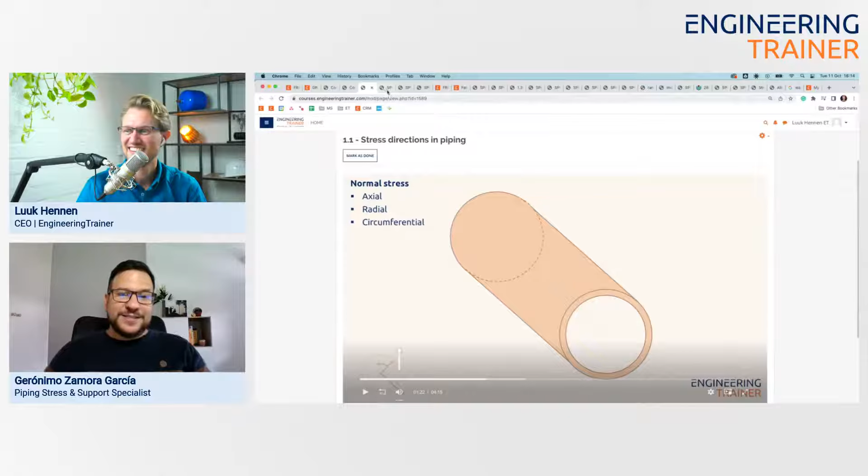So you say it as if it makes total sense that there's wooden barrels that have hoops. That has nothing to do with process piping, right? Is that back in the day, kind of shipping wine in barrels or something? I think when these codes were all developing, back in the 1940s, 50s, 60s, the technology was out there, and they basically said, okay, circumferential stress, let's call it hoop stress. It's the same hoop thing. Hence the name: it's basically the supporting hoops in the wooden barrels. Oh, that's a good fun fact.

So just to dive back into the course: hoop stress, we switch circumferential to hoop, which is displayed here. I won't go into detail about the derivation of the associated equations, we'll jump to those in a second. And basically, what happens every time is you neglect the radial stress because it's rather small. We'll show something about that in a second. And of course you include shear stress due to torsion because that one can be significant.

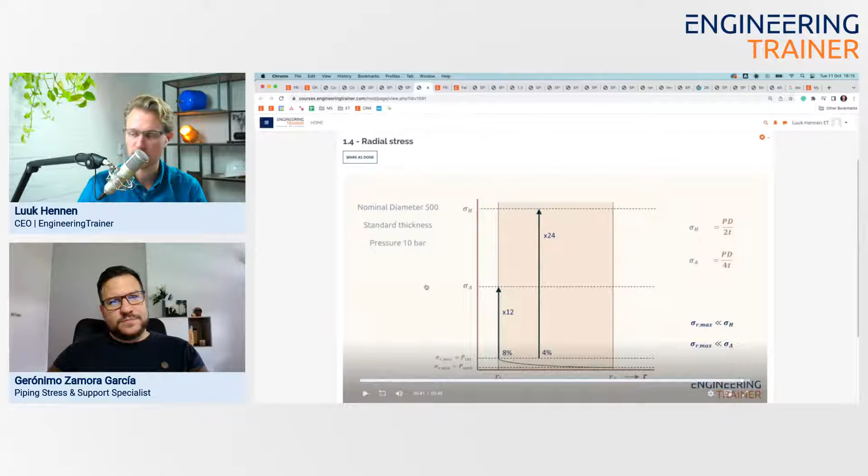As I said, radial stress is typically neglected for thin-walled piping. I did a quick analysis of those numbers for a nominal DN 500 pipe, standard thickness, with a pressure of 10 bars. You clearly see the bottom distribution - this line is the radial stress throughout the wall thickness of the pipe. Then if you jump to axial stress, and especially hoop stress, those numbers are just much higher. We actually have a different free module on thin versus thick walled piping available on the platform as well.

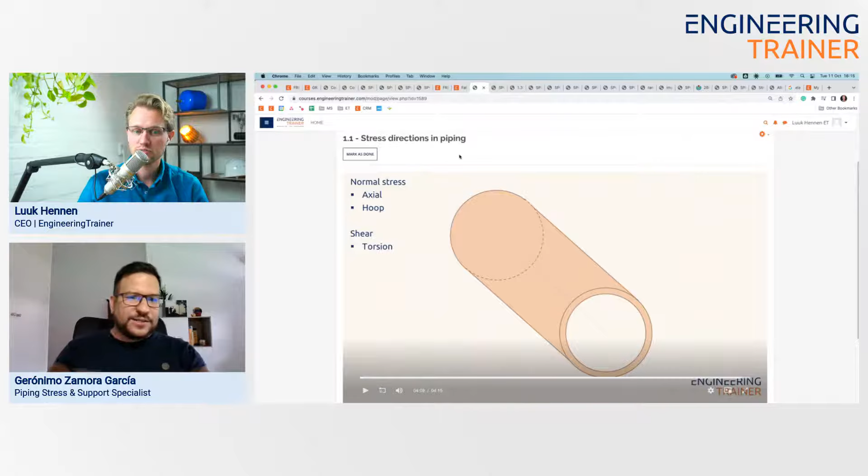All right, jumping back. So in these slides, it's really interesting too. We grab the normal stresses that are typically on a beam, and we take that out to a cylinder. So as normal stresses, you end up having axial stresses, hoop stresses or circumferential stresses, and then radial stresses, put in the coordinates of the cylinder basically.

And then those will be normal stresses, and then you would have shear stress, which the main one here is the one that tends to twist the piping, and that's torsional stress, which is basically the shear stress present in this field.

What's really interesting is, in thin wall piping, we're going to call it that because the thin wall piping is a very blurry definition depending on who you ask, or depending on which code you check. For example, B31.3, it's something -- well, not crazy, but it's thick enough. It's almost, it's not that high, but with the EN code it's almost the same. So to me, that's a thick pipe.

Like it's D over T higher than six, that ratio higher than six -- so that's a thick pipe, generally speaking. But it's that we're using, let's say, thin wall pipe equations to compute thicknesses there, to have some sort of degree of examples here.

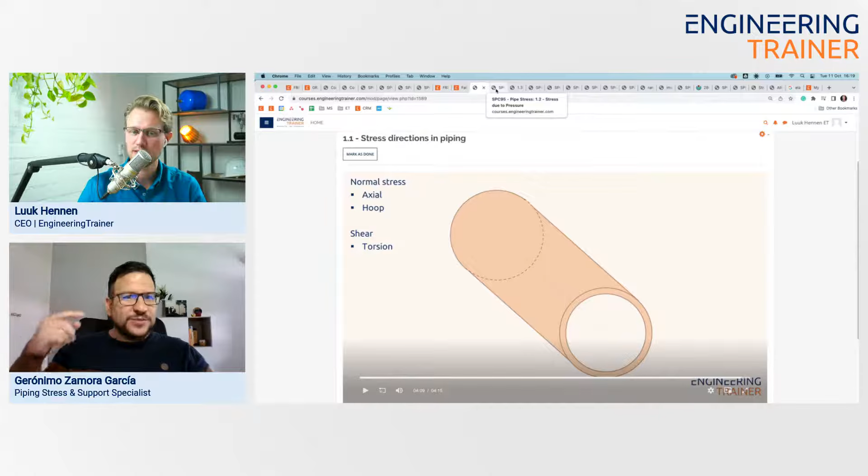So going from this, like when I started, you can, for example, derive these equations for pressure loading -- hoop stress is pressure times diameter divided by 2 times the thickness. For the axial stress, it would be divided by 4 times the thickness, and here the thin walled assumption is already made. The derivations, by the way, are in the course itself. But at some point you'll end up with these types of equations, which are pretty straightforward and are also very well represented in the codes.

If you look at the thickness calculations for piping in the ASME, but also in EN 13480, you'll definitely recognize the basics of this equation. But going from here to the actual code stresses, that was something that took me a while, and that's something we'll do a deep dive into.

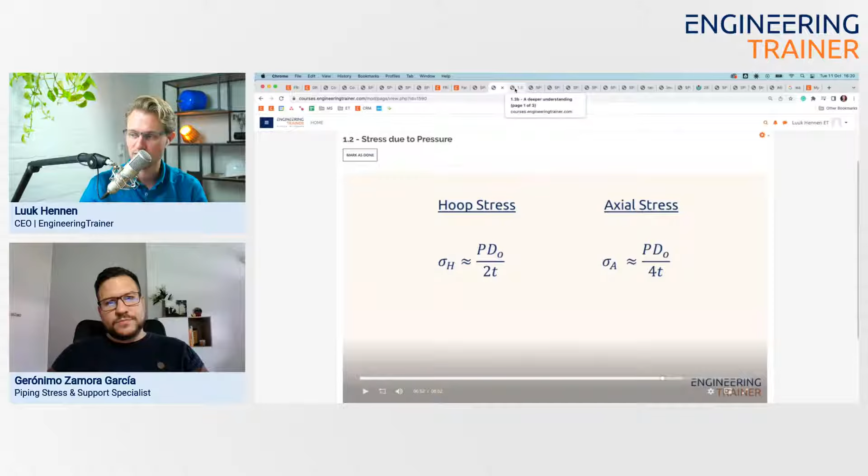Maybe a little fun fact for everyone watching, Geronimo, for you as well. I know you know the answer. Let's say if the pressure in a piece of piping is increased till the pipe bursts open, in what direction will the crack be? So yeah, what do you think?

So the reasoning behind it is like there's always a stress direction, and the crack is always perpendicular to the stress direction, right? So that's why in B31.3 and other codes you use the joint efficiency factor for the longitudinal direction, because in hoop stress the pipe will burst that way, which is important when your pipe is not seamless. You need to account for that efficiency longitudinal, right? As against what you might think, fair point, when you're computing, that's a fair question.

There's an interesting topic when working in the creep range, whether you use the weld joint strength reduction factor with the circumferential welding, because you're worrying about axial stress. So that's up to the designer in that code. But that will be the explanation for the answer, I think.

That's a good answer because you haven't given the exact answer itself. So the answer obviously is that the crack will be in the axial direction, right? I mean the highest stress component is in the hoop direction, circumferential direction, so the crack will actually go axial. But this question always gives good food for thought, in my opinion.

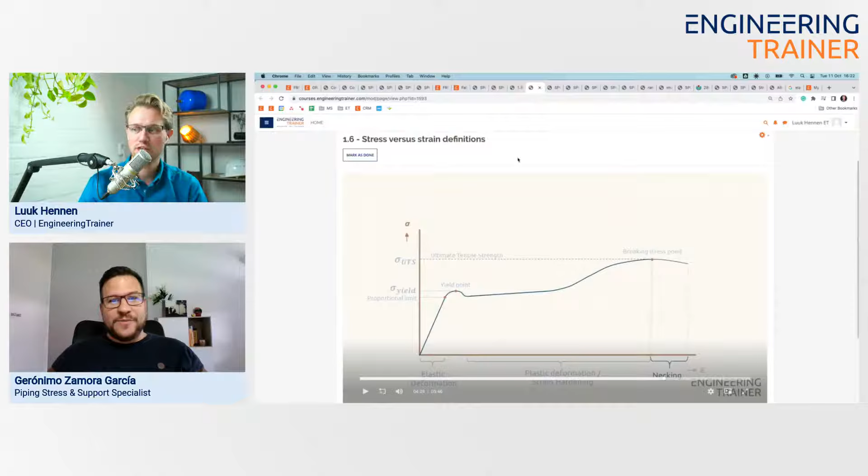So the question becomes, from these directions, we have axial, hoop in the normal, we have shear, torsion stresses, and on the other hand the typical stress strain curves, shown here with stress on the vertical and strain on the horizontal axis. This is typically a simplified view of a stress strain curve for, let's say, metal.

The elastic region is where Hooke's law is applicable. Then we have a yield point, and yielding or plastic deformation takes place until the ultimate tensile stress, after which necking occurs and the metal breaks. But this is a result from a uniaxial tension test, right? So you take a piece of metal and you just pull it apart and you measure the displacement and the force required to do that displacement, and you'll end up with this graph.

But that is in one direction, right? So the question becomes, how do you think about these different stress directions and forces working in the location of metal, and how do you compare it to the yield stress, the ultimate tensile stress?

And the answer, sorry, let me just point this out. It's super important for beginners that this stress strain curve represents, as you mentioned, ductile materials such as steel. Fair point, if you would have rubber or any fragile material, the curve would be completely different, right? I think that's actually in the course though, something like this, a rough, playful view, not to scare away beginners.

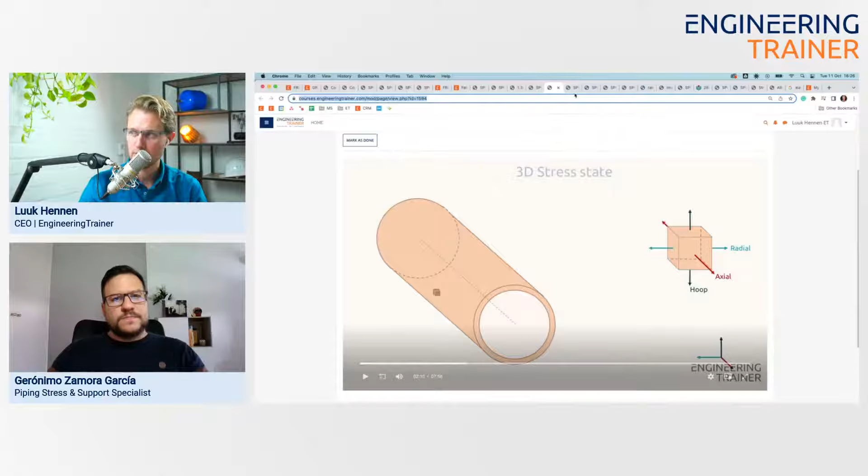You know how to go from the stresses at one location in a piece of piping to the code stresses. Typically, you can think of that location and evaluate it using a cube, which helps you analyze the situation. If you rotate the cube, you can analyze the stresses working on the surface of this cube for all different angles of rotation. That helps you build Mohr's circle, with shear stresses on the vertical and normal stresses on the horizontal.

If you do all those different angles for a 2D stress state, you would end up with all points lying on this Mohr's circle. From this circle, we define the principal stresses, which are these two points with zero shear stress, and we define the point of maximum shear stress. Then those three points for a 2D stress state are representable regardless of the orientation of the cube.

I think that's something to take away. So here, we start with the cube on an orientation that maximizes the normal stress, and if you balance that cube orientation with the geometry, you will maximize the normal stress. Then you start rotating the cube, and it gets to a point where you maximize the shear stress.

Mohr basically found that this described the equation for a circle, and we're able to establish on a chart where the horizontal axis is the normal stresses, and the vertical axis is the shear stresses. So the main goal is to compute, at some point, the maximum point in particular, tau max basically.

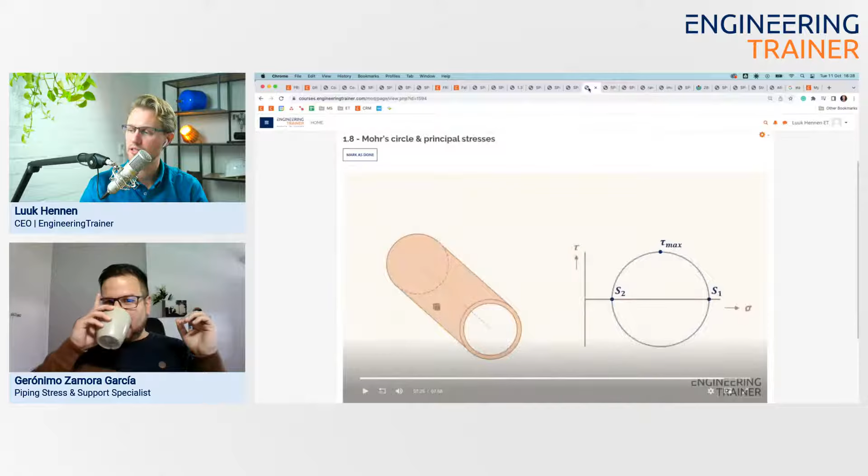It took me a while, and that's something I would like to emphasize: regardless of from which angle you evaluate the stresses at a certain point, if you run through the equations of Mohr etc., you will always find the same principal stresses and maximum shear stress for that location. So those really represent the 3D stress state at that location. That's something really important to have sink in.

Another important thing is how, as you described it well, engineers at some point did it amazingly, found a way to represent the 3D stress state that you might have on whatever stress material that you might get on a metal piece, because this could be extensive—we use it in the piping world, but this is generic.

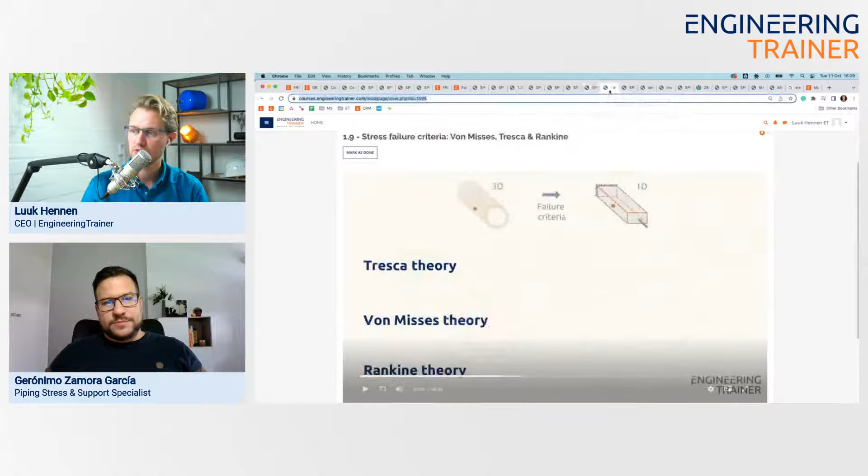So then, how do you go from these values, principal stresses, maximum shear stress, to the uniaxial tension test? Also, another important thing to mention though: typically, can you go back to Mohr's circle? Typically, we're working with two principal stresses, S1 and S2, because we're neglecting... so there's three of them, as we mentioned: radial, axial and hoop.

And then we're working with two, and hence what I said at the beginning, that we can neglect in thin wall piping the radial stress because it simplifies the calculation.

So here's an example. We have an S3 which we're neglecting because it simplifies the calculation, but that will represent the third normal stress. So if you have calculations where you're working with piping and accounting for radial stress, then you will have three principal stresses, S1, S2, and S3.

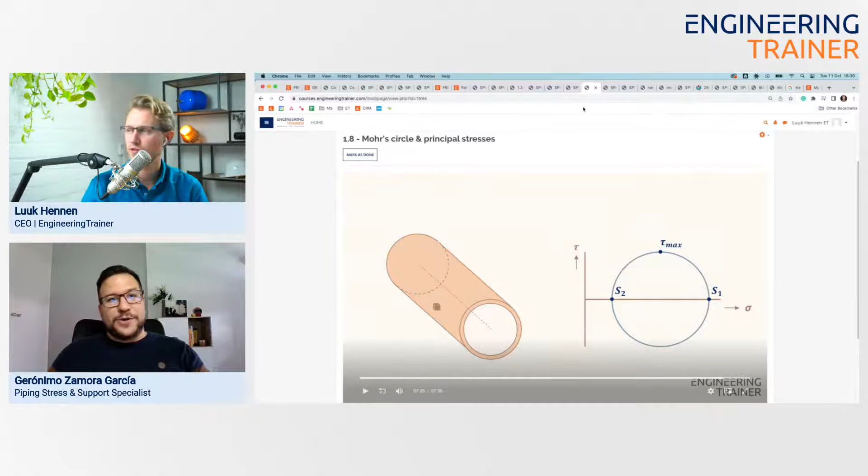All right, go on. Fair point. Good, going back and forth. I like it.

Then there's basically three commercially accepted theories that link those principal stresses and maximum shear stress to the graph shown here, which is from a uniaxial test evaluating stress in one direction.

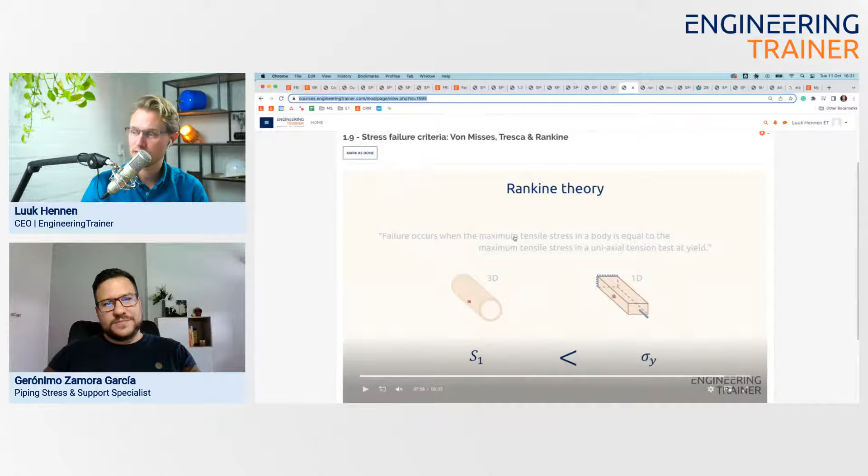Rankine theory, I think the most basic one, says - we'll do a quick wrap up, if you want to really let this sink in, do the module and take some time. Failure occurs when the maximum tensile stress in the body, in any 3D stress state, is equal to the maximum tensile stress in a uniaxial tension test right at the moment of yield.

So basically, it says the highest principal stress should always stay below the yield stress in this uniaxial tension test. If you visualize that in a plot, it would look something like a square. Let's say you have your two normal stresses, and the principal stress is at the edges of this square. You basically say, well, neither of the principal stresses, whichever is higher, is allowed to go beyond the yield point, so you'll end up with a square.

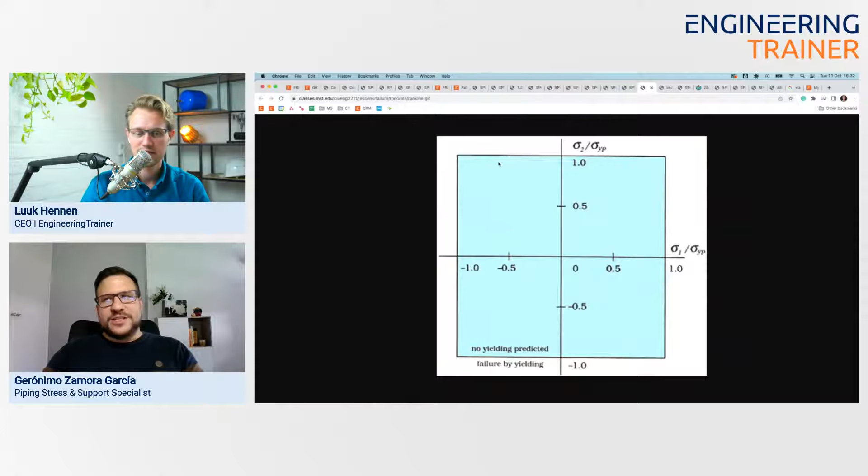Another interesting thing, commonly in mechanical engineering, is that these theories must work for fragile materials rather than ductile materials.

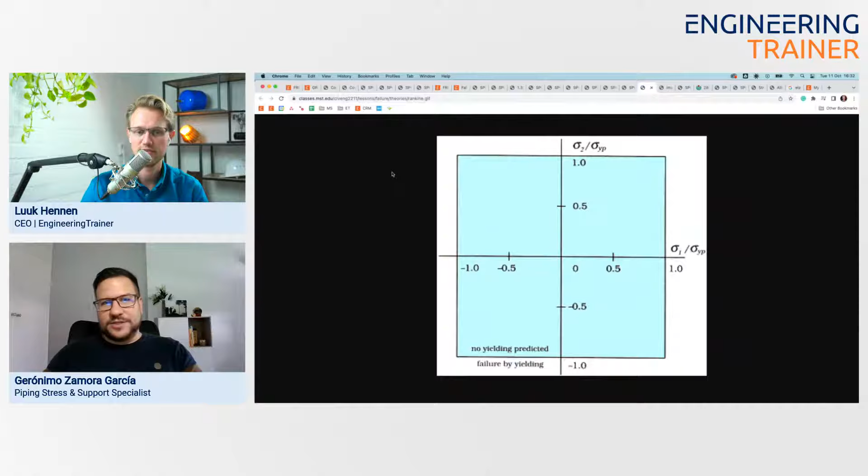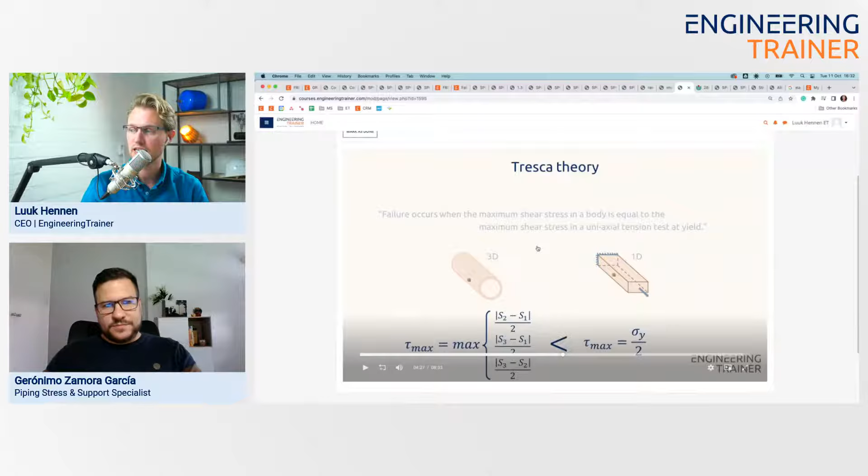So things will get a bit more complicated if we use Tresca. Tresca states something else rather than just taking the highest principal stress and comparing it to the yield stress from the uniaxial test. It says failure occurs when the maximum shear stress in the body, in any 3D stress state, is equal to the maximum shear stress in a uniaxial tension test right at the moment of yield. So you'll have to look at the definition of this maximum shear stress and the equations behind that, evaluate what that would give for the uniaxial test at the moment of yield, and then compare the 3D stress state of both.

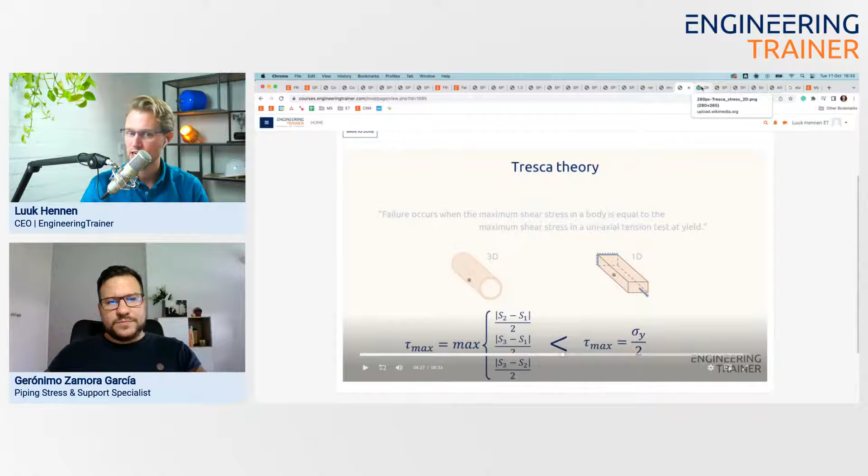Just a simple visual - again, both principal stresses plotted against each other, where the Rankine theory would bring a square, so you're safe as long as you're inside the square. Von Mises and Tresca theory will result in either this oval shape, or this blocked oval shape between them.

Those stress failure criteria are kind of the missing link that typically takes some people time to sink in. Going back to the theory, which is important to highlight - there are three theories.

It is really amazing that several codes would use either Tresca theory, at least when working with metal, like ductile materials. By the way, this only works - it doesn't work with orthotropic materials, since you might have different properties. Hence we're working with carbon steel basically, a ductile material.

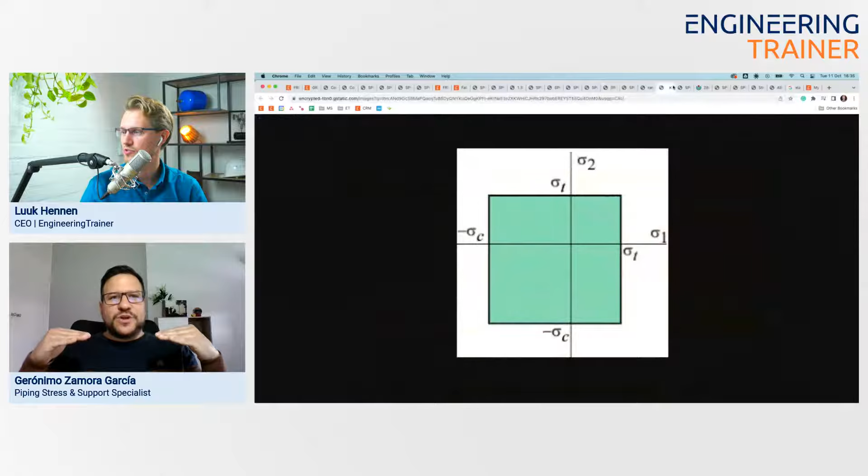So which is important to highlight is that most piping codes rely on Tresca theory. They use Tresca theory, which is important, because there's a balance to it - when you assess the final result from the safety factor, Tresca theory is the one you can rely on.

Yeah, you can leave that one right there because it explains a lot. My point being, you might have B31.3, which uses Tresca to compute the stress levels, and then compare those against, as you were explaining, your 3D stress state, which gives your maximum value, and then you compare it to an allowable value. In this case, the allowable value will be based on either yield stress or ultimate tensile strength, right?

Which is interesting is when you see it from that point of view, you would have a theory giving you some results, and safety factors that are higher for this type of criteria. And then there are other codes. One, for example, is ASME Section 8, Division 2, Part 5, which is designed by analysis that allows you to use Von Mises.

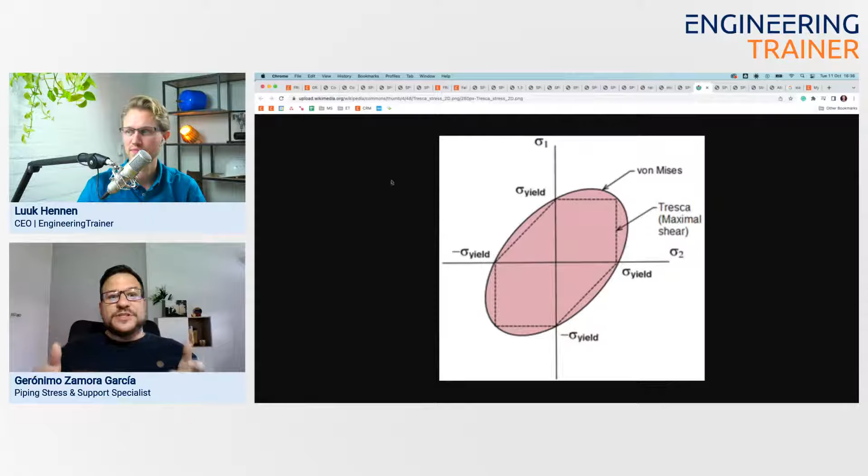And what's really interesting is if you compare the safety factors - you'd need to go to Section 2 Part D to find these allowables. But when you compare them, one set of allowables might be meant for Section 8 Division 1, and another for Section 8 Division 2. You might find that allowables for Section 8 Division 2 Part 5 are less conservative, because the reasoning behind it is you're doing design by analysis, not by rules. It's a more tuned analysis, so it allows you to take advantage a little on the safety factor side, which is really important - how that theory is applied to codes.

Maybe I'm jumping ahead a little, but I know that for ASME Section 8, Division 2, design by analysis, Part 5, there's some allowance for certain stresses - some yielding allowed as long as it's very local, which causes a stress distribution. I always thought that was fascinating. It just depends.

That's very, very interesting, because it depends on your failure mechanism too - we're going to talk about that in a minute, which is important. For example, when you compare ASME B31.3 process piping code, there you might have allowables for primary stress based directly on yield stress, if you're not in creep range. When you're not in creep range, you'd have an allowable based on yield stress and ultimate tensile stress. But that's for primary stress - you'd define that your sustained stress should be less than 2/3 of the yield stress.

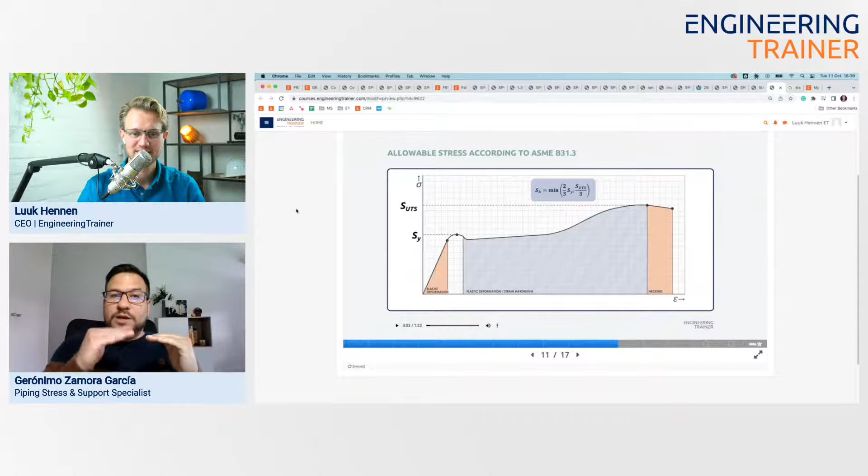Not many people know this. We're going to talk about it in a minute - it's related to the elastic equivalent stress we were discussing earlier. The equation for SA, your allowable stress for displacement and stress range, under certain conditions would allow you to get even to yield, or even a little above yield.

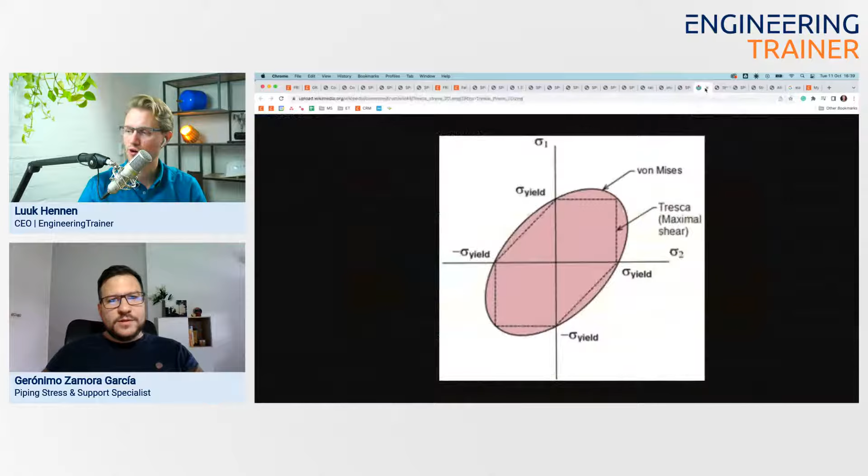Alright, let's jump back to the main storyline, and then we'll go into more detail. So if we go from these stress failure criteria and fill in the details - for example, if you look at maximum shear stress, the equation itself, with the square root and then a square in there, this looks a lot like Pythagoras, obviously.

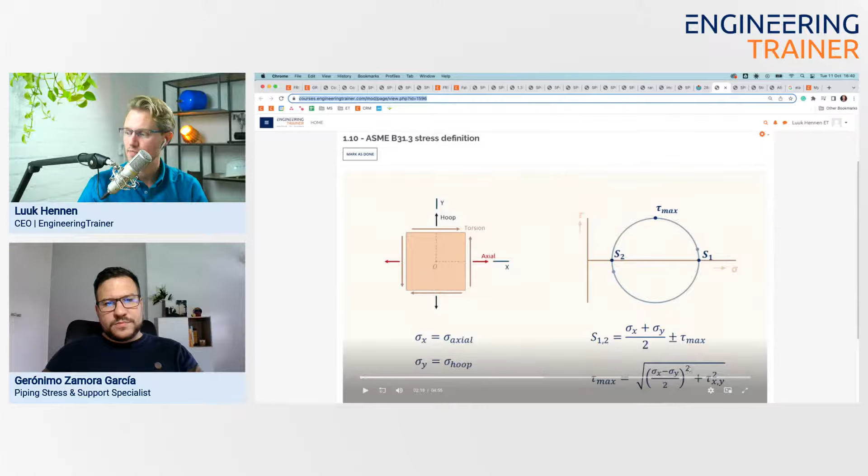It already looks something like what you can see in the code, shown here at the bottom: the displacement stress range. This is from B31.3. Displacement stress range is equal to, and there we again see this square root, which has this look and feel of the Pythagoras theorem. You pointed out a true typo in this sheet, which is basically that in the code it doesn't say tau, but it says the stress.

That's a mistake from my end, which is solved in the Spanish version. So for Spanish-speaking people, it's not a mistake, it's just a typo, improved.

Basically, here we see the link from everything we discussed, going from the uniaxial stress test to the 3D stress states, and we fill in all the equations for the principal stress that we find if we do the detailed calculations, which are shown in the videos. If you actually fill it in, you'll end up with this equation, which is the same. The symbols are a little bit different, but it's the same representation as the displacement stress range. So that links everything together, which is basically what we wanted to highlight here.

If you would like to take a deep dive into that, it's in one of our videos, I think the last one, number 10. Basically, what's happening there is we grab the Tresca theory, replace the principal stress with the corresponding stresses, and do the math. To simplify things, we use the safety factor, introduce the two into the other side of the equation, and you end up having that particular equation.

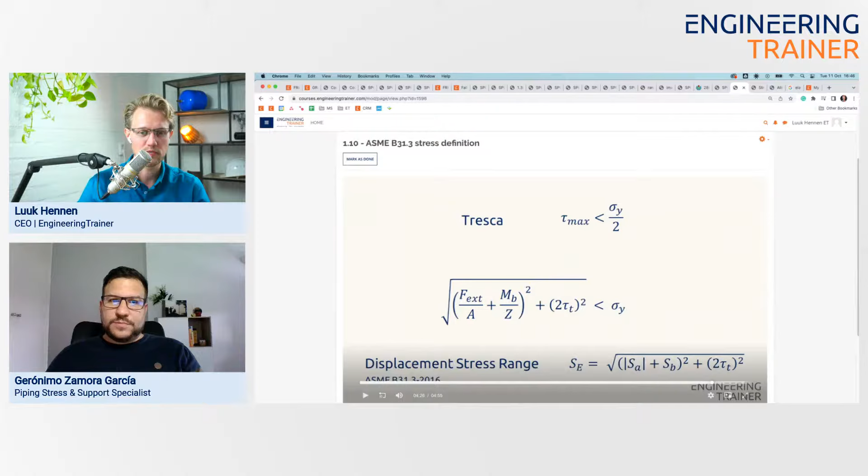You brought a second one to the table as well. So it's all connected, right? Like your failure mechanism, and then it will be summed up - you would have your self-limiting stress, and you will have your non-self-limiting stress, and that's the key behind it, because every force-based type of stress is non-self-limiting. That means pressure, your stress, gravity - that means that your stress won't stop, it will continue, if you allow it to, it will continue until it breaks, right? And then the reasoning behind it is the other side of the puzzle - the

material itself behaves differently. So if you analyze this type of stress-strain curves, you will get that for primary stress, if you assess it from a primary stress point of view, you will end up having one stress-strain curve, and then if you assess it for a self-limiting kind of load, you will get different results. What happens there is that in the curve, the strain is increasing in self-limiting stress, but it would increase slowly, so you will have a big region of stress being close to the yield stress. So that changes everything, because the material won't behave the same way when it's being subject to self-limiting stress and when it's subject to non-self-limiting stress.

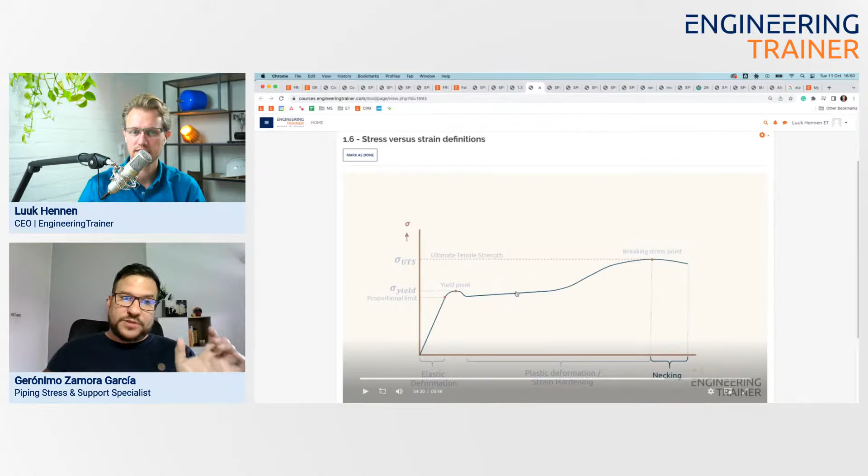The equivalent stress can be several times higher than the yield stress, yet the actual stress is still the same as the yield stress. So if you're extending this line and you get a failure of 400%, that's not real. What you're doing is controlling your displacements, controlling your strain. In every typical pipe stress software, it uses this definition of elastic equivalent stress, so what you're doing is controlling your displacement, designing for the displacements. That's why it lets you get super close or even pass the yield stress a little bit, because at that point stress is not relevant, but strain. It will simply stop straining.

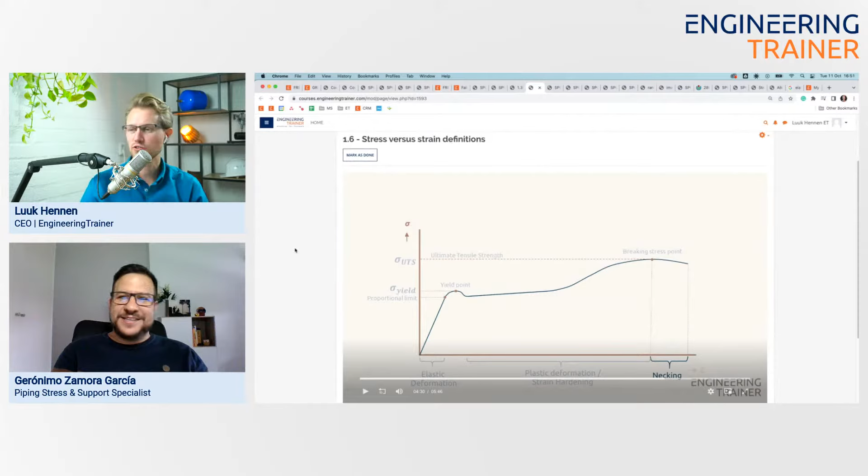Cool man, all right, let's wrap things up Geronimo. We've been going for a good 50 minutes now.

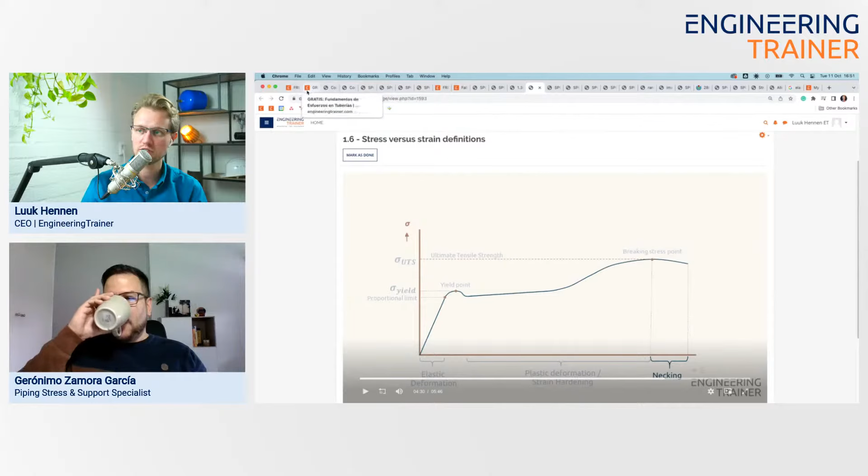My recommendation would be to go to Introduction to Pipe Stress Analysis by Sam Kannappan. It's a really interesting book. He's an Indian guy, a brilliant mind, who basically lays out all the information very, very well. It's good to start at that point, and then you should jump right into the pipe stress engineering made by the mastermind, L.C. Peng and Tsen-Loong Peng. That book, to be honest with you, changed my life. I've read it more than 4 times, and every time I read it I find new stuff. It's amazing, I recommend it.